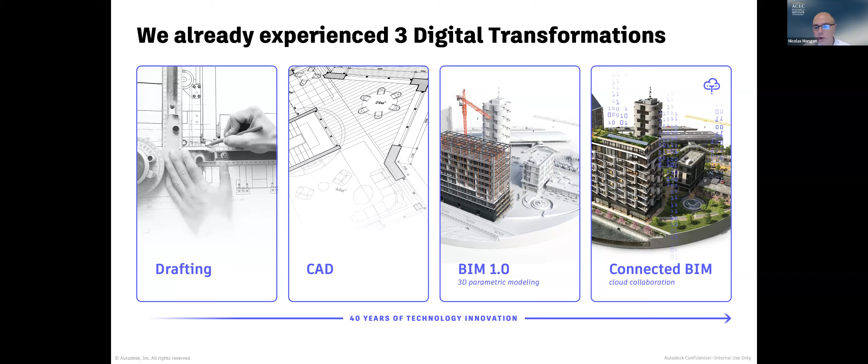Today, BIM is the backbone of the digital transformation. BIM is a process that millions of people in the world are using to design, build, and operate facilities. At the end of the design and construction process, we get a digital twin, so a digital twin is an output of the BIM process. I'll talk about that.

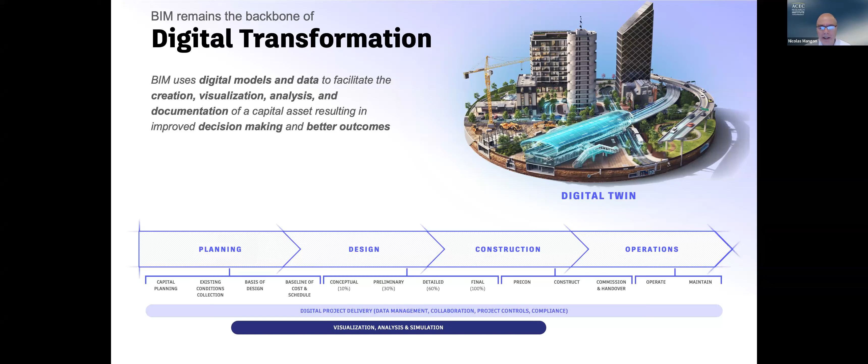But before we do that, I want to talk a little bit about the key trends that are actually shaping our industry right now, and also influence the need of using a digital twin. All of this data that's happening will be foundational for artificial intelligence. Right now, there are three big buckets of trends happening in the industry. The first one is about the demand.

What we are hearing is there's more work than ever before, driven by three things: demographic shifts—the population is growing, moving in and out of cities—stimulus packages, especially in the US, and also sustainability requirements. Last year in the US, we had more renovation projects than new projects, the first time in the history of this country. And finally, resiliency—we need to protect and repair existing assets because of all the natural disasters. So there's a lot of work, more work than we can do.

The second trend is that the way we work has changed dramatically. First, we don't have enough people to do all of that work. We work remotely, and there are challenges in the supply chain. To address some of the challenges around lack of productivity, we see an acceleration of industrialization of construction.

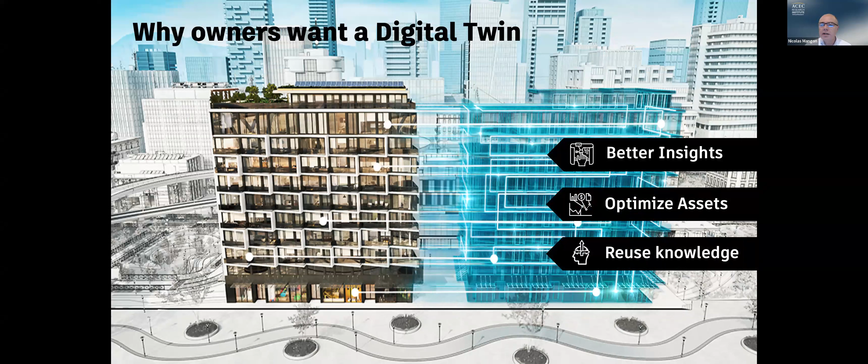But when you think about a digital twin, we need to ask ourselves, why do owners want a digital twin? Because today the owners want to get really three things. So they want to get better insights during the design and construction process. They feel they don't have the visibility in terms of what's happening in the process. So they believe that a digital twin during capital project will help them.

They want to optimize their assets in the long term, meaning in the life cycle of operations, when the cost of ownership for the entire asset is about 70%. So they want to optimize performance.

And then finally, they want to reuse the knowledge of the design, construction and operation process for future projects, right? So they want to capitalize on all of this knowledge, for the next school, the next hospital, the next bridge, the next road, the next tunnel. So they want to capture information during the operations and then reuse it later.

But for the purpose of digital twin, we are going to discuss more what owners want to do with a digital twin. The first thing they want, of course, is a digital handover. And just like we as engineers design and build a physical asset, what we need to do is also design and build a digital asset.

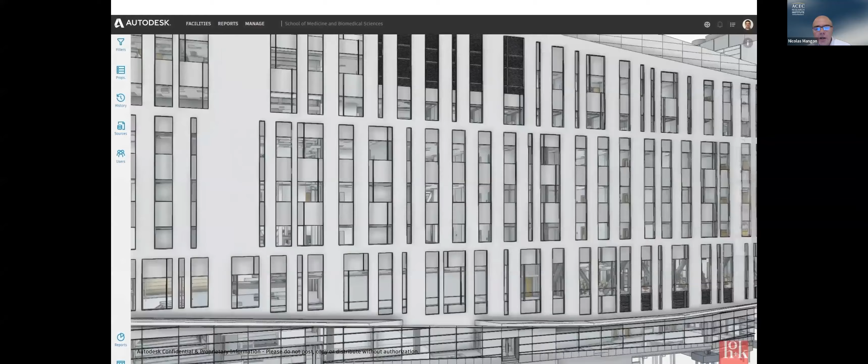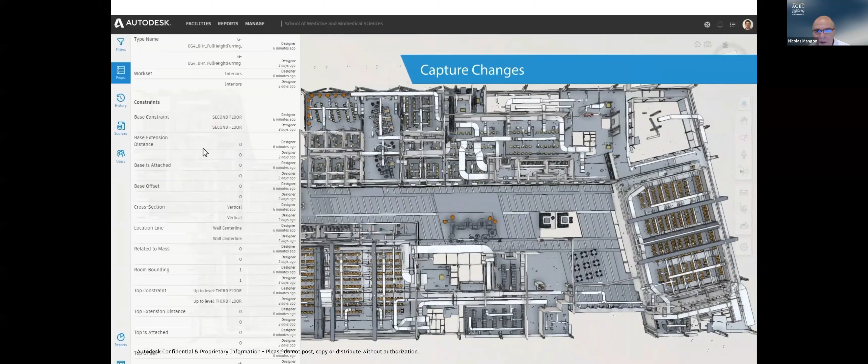It's really the physical representation of an asset. Here it's a building with all the necessary information about each of the components, the systems, but also the maintenance information. Sometimes it's not all the data of a project - maybe the reinforcement is not required, maybe there are things that are not required, maybe just the description but not the physical representation for the owners. So that's I would say the first level.

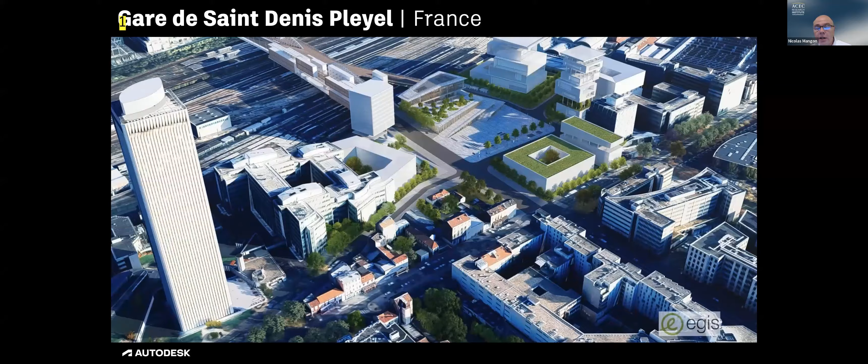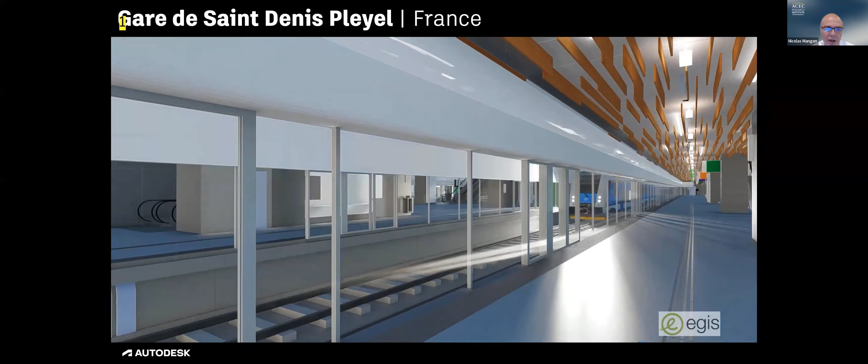And it could apply for buildings, but also for infrastructure projects, just like this train station. This one is in Paris, where I'm from originally. You can see in this case that digital twin was created by a large engineering company called Egis, that maybe some of you might know. So it's an example of using it for infrastructure.

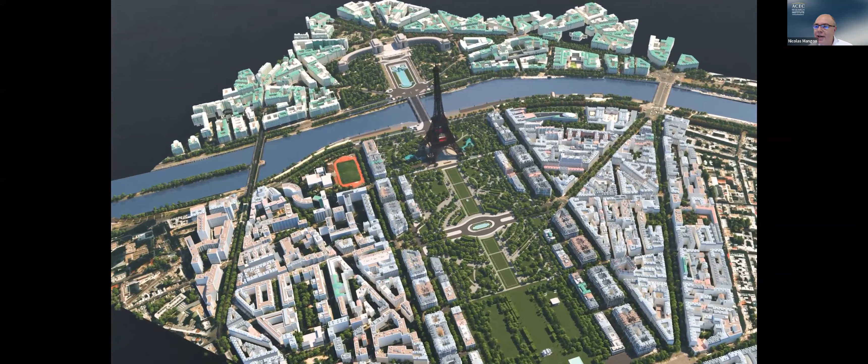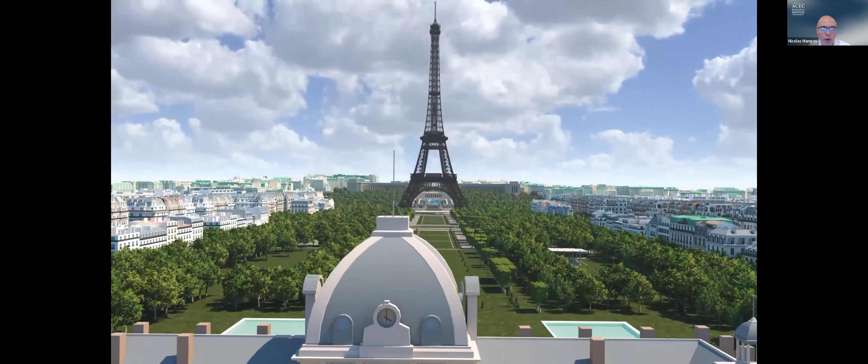And because we love Paris, this is also a project at the city level of a digital twin. The city of Paris is renovating the area of this tower - I think everybody knows about this tower. For this, we worked with WSP to really create a complete digital twin of this neighborhood where everything was modeled, every single tree, utilities, roads, and everything.

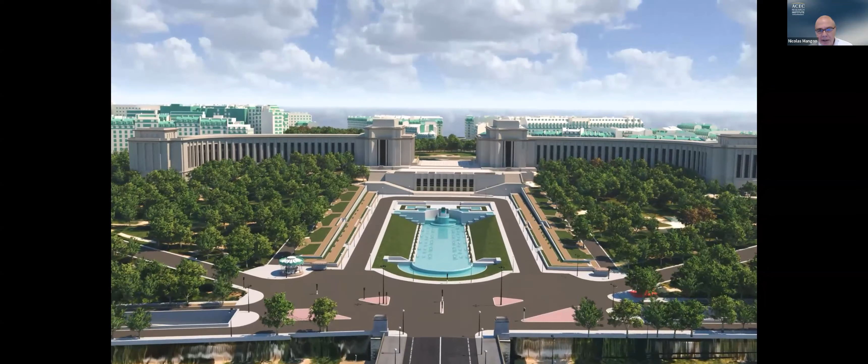In this case, the owner, which is the city of Paris, wanted to have a digital twin really to give it to different architecture and engineering firms so they can submit proposals for the renovation of this space. So everybody would have the exact same data - they don't need to go on site and measure or get any information about the context. That was a way the city of Paris used a descriptive model for digital twin.

The next level of digital twin, which is critical for optimization or performance optimization, is really to connect some of the live data. When I say live data, it's information about sensors - it could be a deflection on a bridge, it could be humidity, temperature, whatever. Basically we want a dashboard to understand what's going on with the asset in real time with any kinds of sensors. So it's about normalizing the representation of time history data.

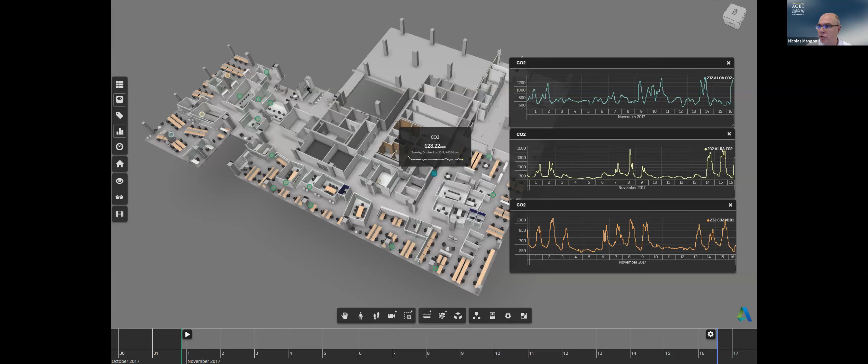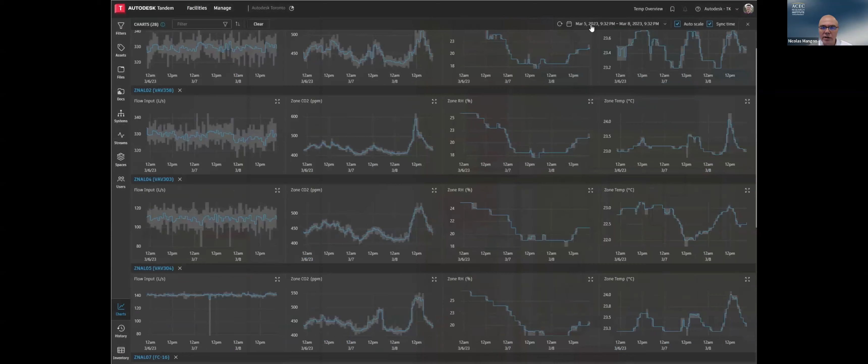It's about representing this information on a 3D model, so it's easier to understand the trends. Here's another example - we can see different heat maps in real time, in this case of temperature, but we can also select a specific room and understand dynamically, humidity, etc. So that's the next level.

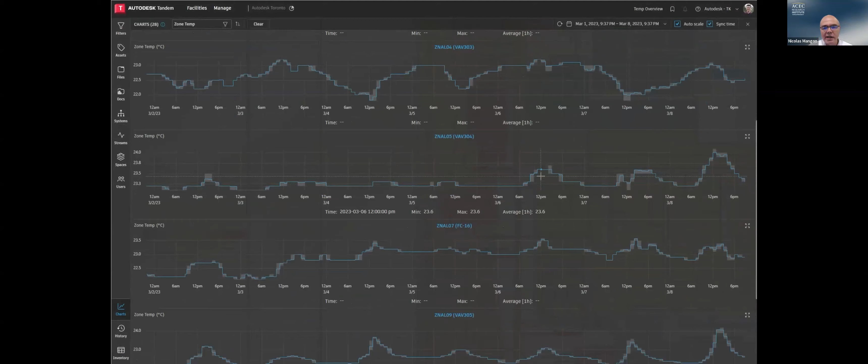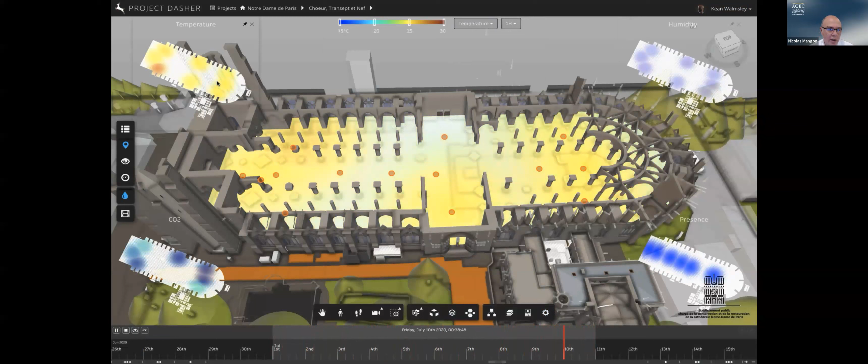As you know, Notre Dame burned almost five years ago, four and a half years ago. So for future projects, we also created a digital twin. On this digital twin, in real time, you can measure carbon, you can measure presence. So remotely you can understand the different things happening in this building.

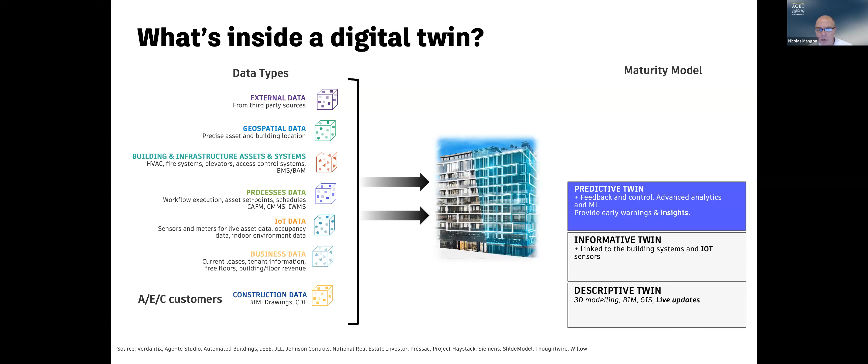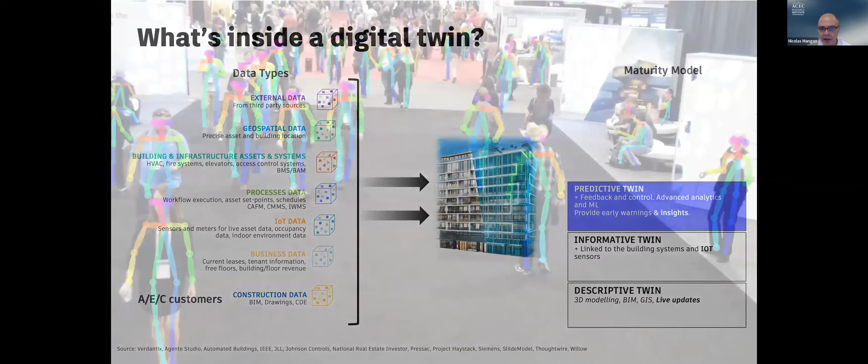The next level of digital twin is what we call a predictive twin. In this case, it's about providing advanced analytics, providing insights, providing warnings about something that's happening in the facility. Here's an example of analytics - in real time, using computer vision, you can actually track what people are doing, and you can also analyze, for instance, if they go in a specific space, are they going in the right direction or not.

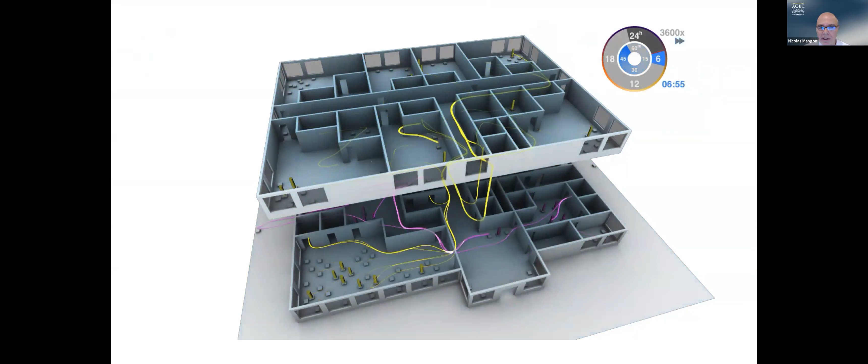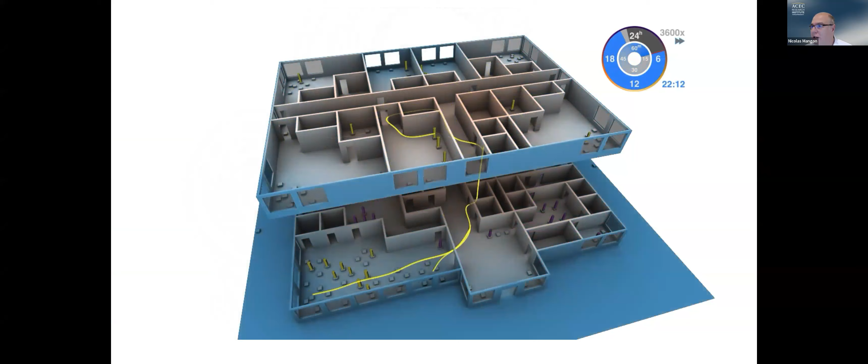I'll show you this visualization, for instance, where the digital twin shows us during the day where people are circulating in this facility, and it's also based on temperature when we open or close windows. So it's advanced analytics to really track what's happening - that's the level of insights you can get from a facility. If it's a bridge, you can look at traffic, pollution, all kinds of different factors at the same time.

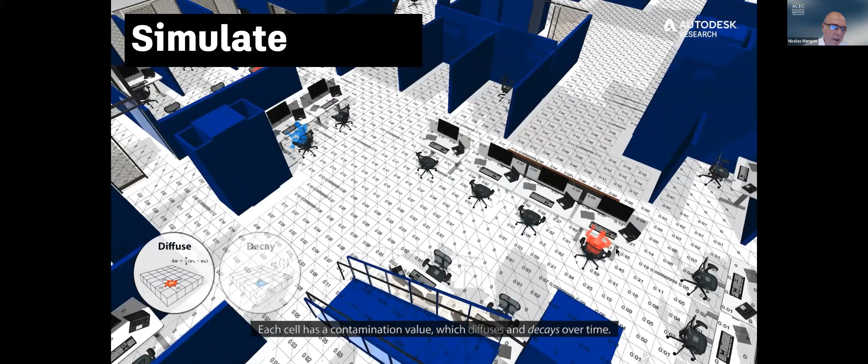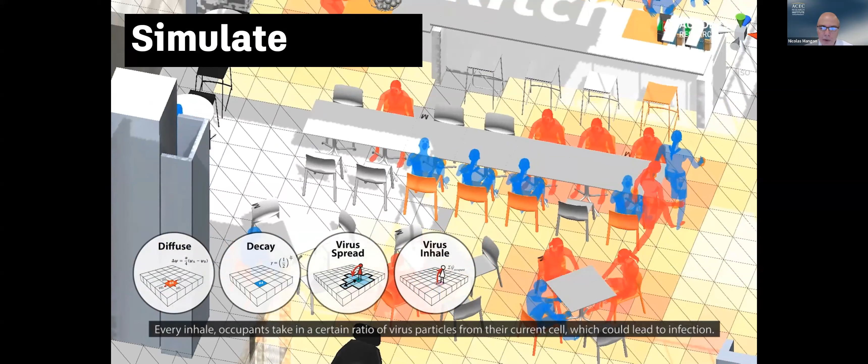The next level, almost the last one before we start questions, is what we call the comprehensive twin. Really, in this case, what owners want to do with a twin is a real-time simulation - they want to do what-if scenarios, simulate different things happening in the built environment. One example we researched with owners during COVID was the spread of the virus on high-touch surfaces, but also airborne, and we could build this model in a digital twin to understand how the virus would be transmitted from one person to another.

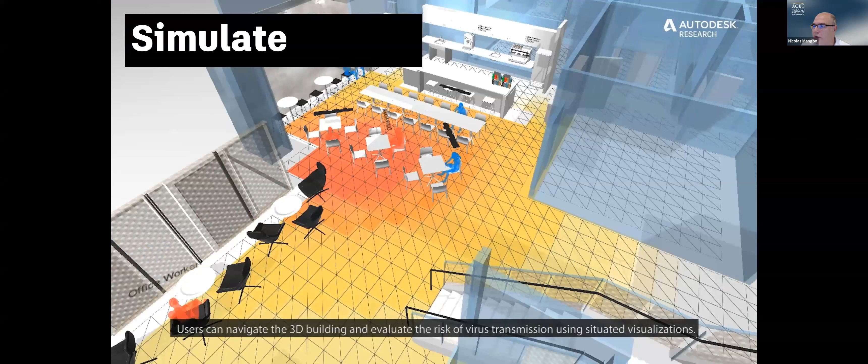And then that was used by this owner to reorganize the flows in the building. So it's a good example of using simulations for understanding what's happening.

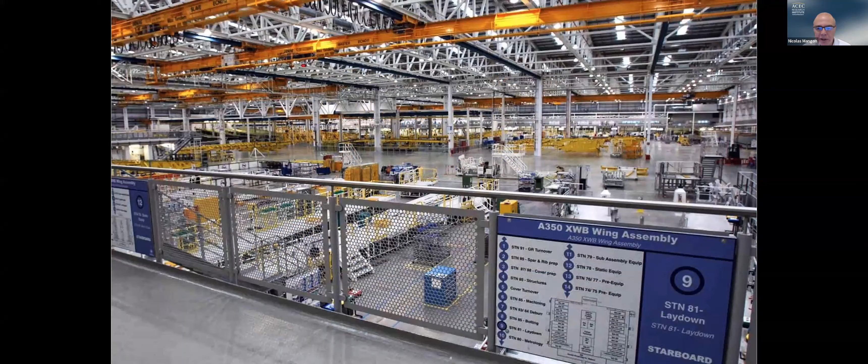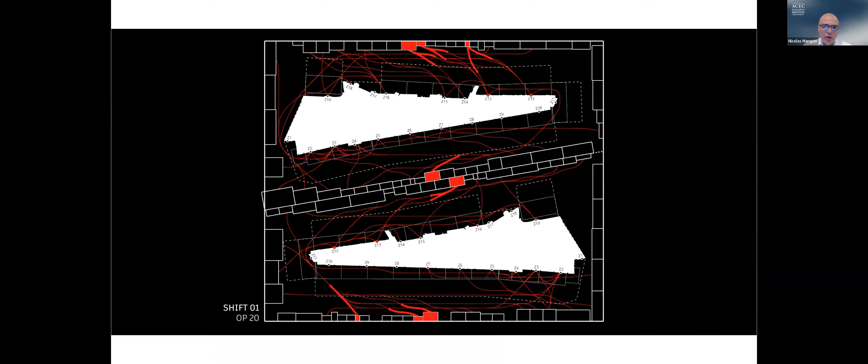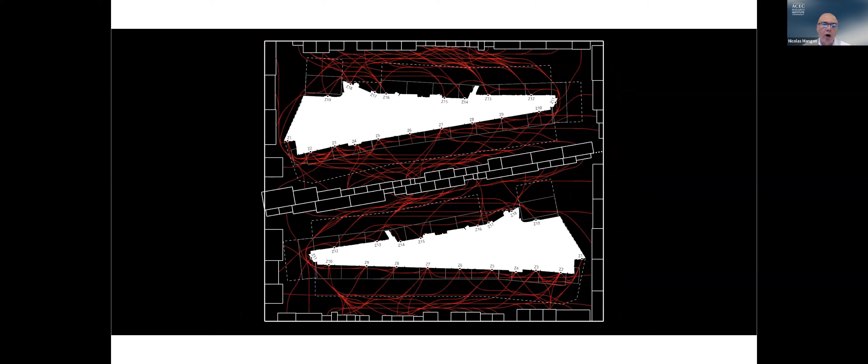We wanted to minimize the distance they need to walk to get specific tools. You can see here a simulation of a digital twin of the factory where we could optimize the best path forward. So that was an example of doing these real-time simulations and prescriptive analytics, where the digital twin could recommend a different way of placing the wings.

And then finally, the last level of maturity for a digital twin will be around autonomous twin, where just like self-driving cars that we have today more and more, the assets will also be self-driving, if you will, and autonomous, and make decisions on behalf of users. Of course it will be powered by a lot of artificial intelligence, and we'll talk about it in the next section.

So just to close on the topic of digital twin, today if you look at commercial products and where things are scaling, we are really in the descriptive twin. That's most of the digital twins, and some informative twins, but it's very early. Digital twins are still pretty rare because owners do not know necessarily how to articulate their needs. We see more tech companies, like Microsoft, Google and Facebook, that are very aware of this because of their background, and they are in a better position to articulate what they want.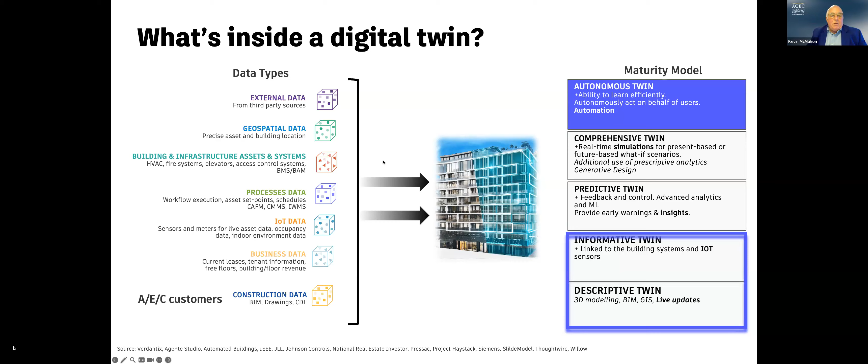Nicolas, thank you very much. That was very, very informative, and I think gave us all a sense of the different levels of digital twins.

One comment before we get to the first question: as you mentioned, tech companies are more aware of the possibilities of digital twins, but it sounds like they may also be better skilled at delivering digital twins to clients. So the industry needs to catch up to be in a better position to advance this needed tool. With that in mind, how can a firm, whether smaller, mid-sized, or larger, get started creating digital twins? Where do you develop the talent to do this?

Yeah, so we are still in the early days of this technology. Just to give you an idea, today about 60% of engineering firms create 3D models. So still not the entire industry uses 3D models. I think number one, the use of 3D modeling becomes more important, and that's where companies need to start. But before we get there, a conversation with the client about what they want to do with a digital twin is important.

Because if you look 10, 15 years ago, a lot of owners were asking for 3D models or BIM deliverables. In their mind it was really to get the projects on time, on schedule, but not really to use the assets. Now the conversation is evolving, and when owners require a BIM deliverable or a digital twin, it's critical to understand what they want to do with it, because you will put some level of information in it based on their needs. Sometimes it's just for measuring things, sometimes to track performance, sometimes for managing maintenance, etc.

Okay, so AI needs to be powered by better connected data, and I think that's fundamental. If you think about the future of BIM, it needs to be powered by better data. First, what we need is this concept of a digital thread where data needs to flow from one place to another. Today, I wish it's happening, but it's not happening. People exchange files, you import, you export, you lose data, you recreate the information, and that's just going from planning to design to construction, and if you're lucky, to operations.

But the value chain of data is very fragmented, very manual. With an explosion of tools, people spend most of their time managing data and moving data around. And in this case, I'm not even talking about bringing data back for learning. So I think that's the second part. To really empower AI, we need to have this digital thread where the data can flow. That's fundamental, that's a prerequisite.

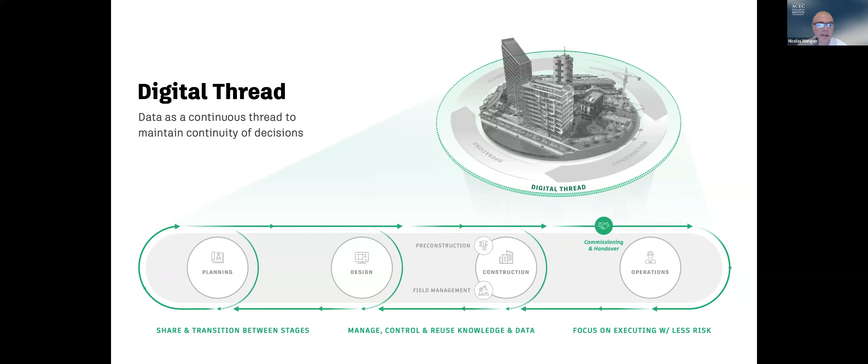And the way you do it is by changing the way software companies like Autodesk, but many others like Bentley and others, need to organize the data. And for us, at the center of it, there is this idea of granular data.

Today there are many vertical tools, many point solutions, where files are really associated with the tool. So moving forward, what you will see from a lot of different technology companies is we are going to decouple the data from the applications.

And when we do that, we create a different kind of data repository, where data is very granular. Every piece of data will be of the same currency, whether it's a column, a beam, a line, a circle, a window, whatever, whether you use a horizontal tool or a vertical tool, all the data needs to be the same currency.

If we get to that point, then the data will be able to flow a lot more seamlessly. You don't need to import or export. All of the applications will just access this granular data.

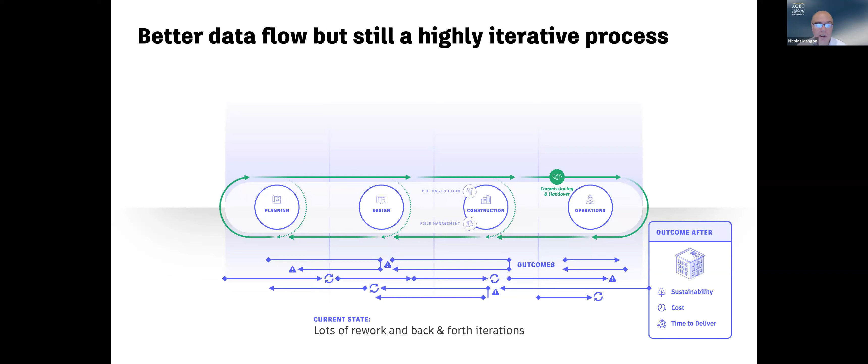very different, where we define the outcomes in the beginning. And we say, hey AI, I want a building that's going to cost 200 million. I want it to be delivered in February 2026. I want it to be prefabricated. I want it to be net zero, or whatever.

And then the AI, based on real world context, previous projects, and all kinds of rules, will only suggest options that meet this criteria, meaning the outcomes that you want. That's what we call an outcome-based approach, where you start with the criteria, whatever they are, and then you get an outcome. Instead of getting the first or the second or the third option, you get the best option.

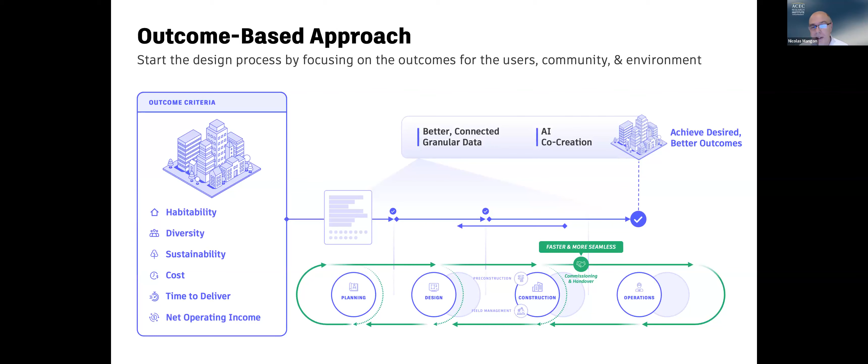So that's a long-term vision. It's going to take a while, it's going to take a decade, before we get to something final. But that's the idea, where there's co-creation: you define your goals, and then the AI will create something for you.

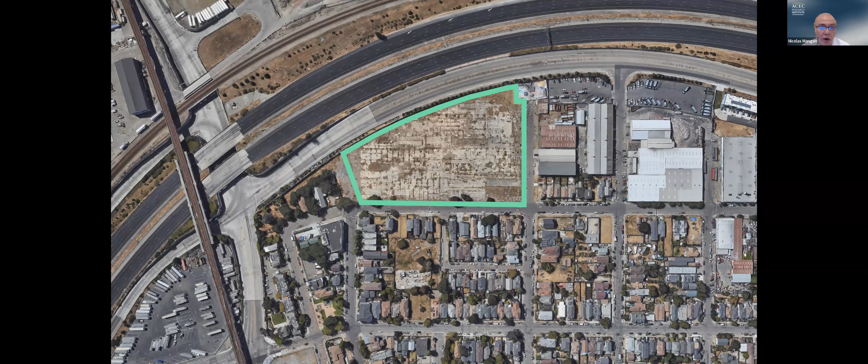So I can show you a couple of examples here that we've done. Simple project, it's actually in the Bay Area, I think on the East Bay near Oakland. It's a development, and in this case, we asked the AI, based on a set of outcomes that you can see here, to generate all kinds of options.

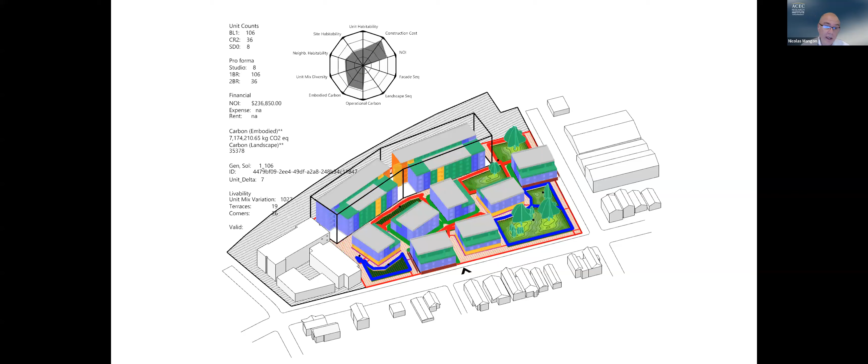And then the AI will iterate and find some solution. It's never going to be perfect, so as a designer, you pick what criteria are the most important. If you say I want a building that costs $1 with 50 units, it's not going to happen, right? So you need to prioritize your outcomes. That's an example of AI iterating here.

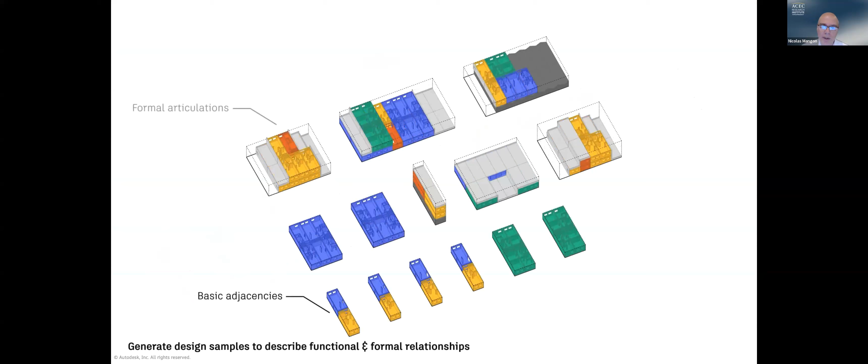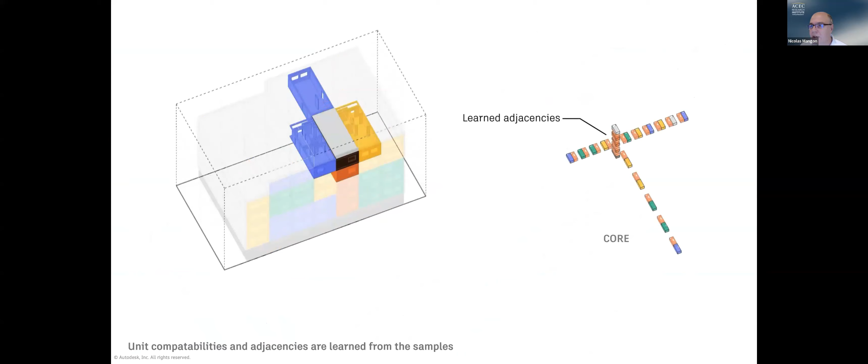But let's say we make it a little bit more complex. We want to use modular construction, and we built a library of different modules, like a kitchen, like a one bedroom, etc. In this case, for a given solution that the AI found, we can say, hey, find the best combination of these modules, so we meet the cost, we meet the time, we meet the local requirements, etc.

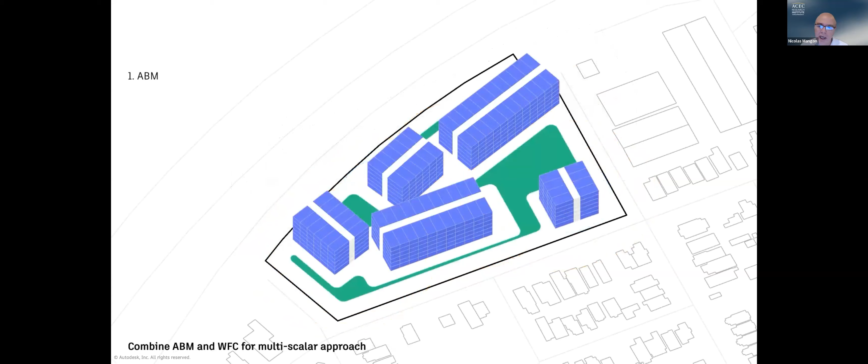So in this case, the AI, for a set of buildings for one solution, iterates and then finds the best solution. But we can make it even more complex. In this case, we can ask the AI to iterate not only on the shape of the buildings, but also on the components.

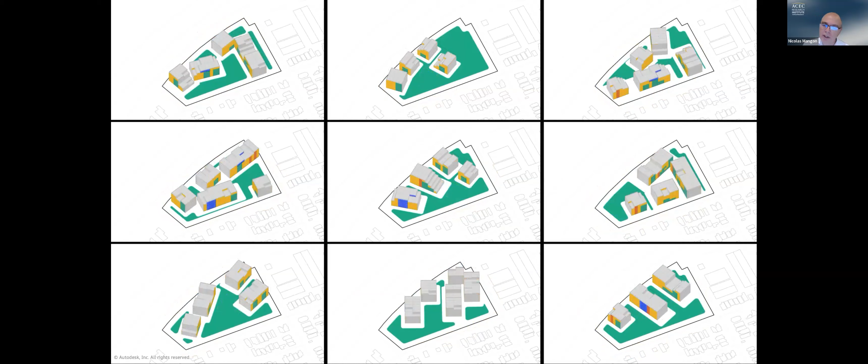And here you get hundreds of thousands or millions of different solutions, and the AI will tell you which one is best. That's an example of what we call generative AI. Is it perfect? No, but it's a very good first draft.

I'm sure by now you notice English is not my first language. So when I need to write a letter or something, I don't like it because English is not my first language. I start with ChatGPT and say, I want a letter like this, for an application for my daughter, for an apartment or whatnot. And ChatGPT would create a very good first draft, and I change it, I tweak it, and then I can keep going and do my work. Here it's the same — the AI gives you the first option, not the best option, and then you can keep going.

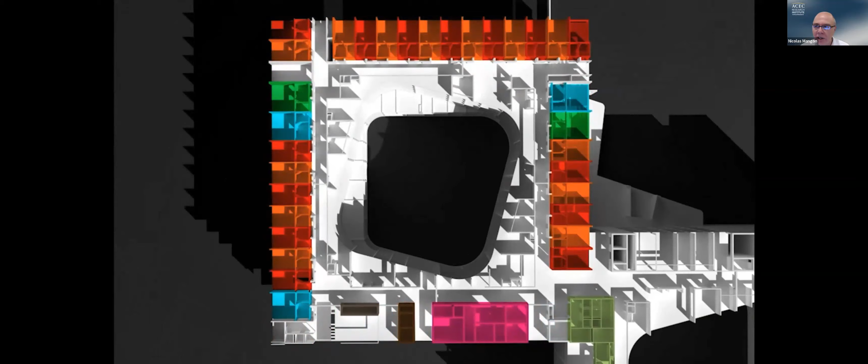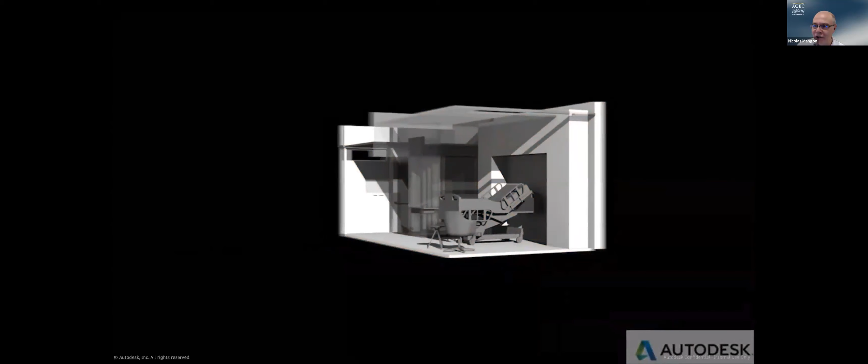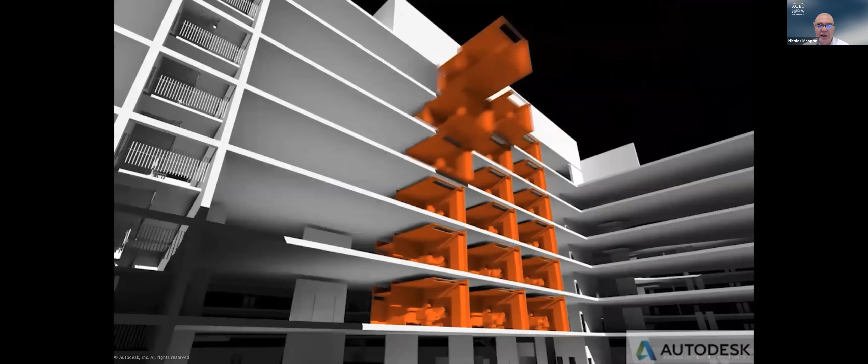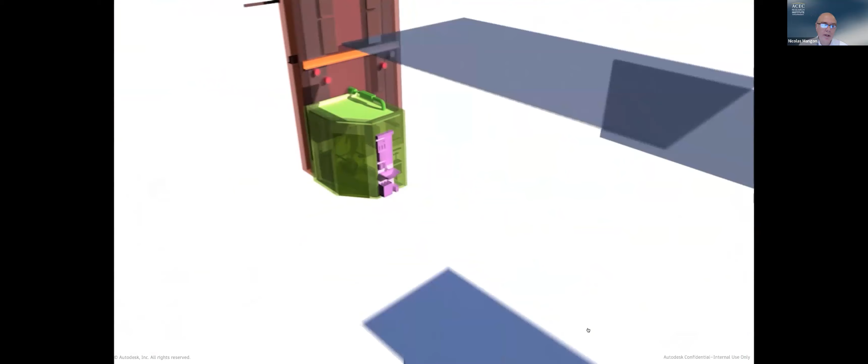So it's an example where the AI informs you, gives you insights, and suggests something, but it's not creation. Another example here, still on the same topic: it's generative AI, where the AI can pick the right components to create a module — that's a combination of informative and generative AI.

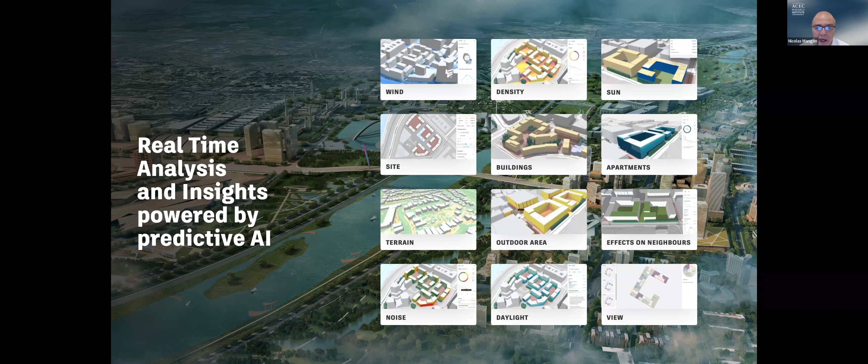The last example I want to show you — if we have engineers, I think it's mind-blowing for me. It's what we call predictive AI, and basically what it does is real-time analysis. Today, if you want to do a structural analysis, non-linear structural analysis, energy analysis, or CFD fluid dynamics analysis, it may take 10, 15, 20 minutes, an hour — it takes a long time. That's why you don't do calculations all the time.

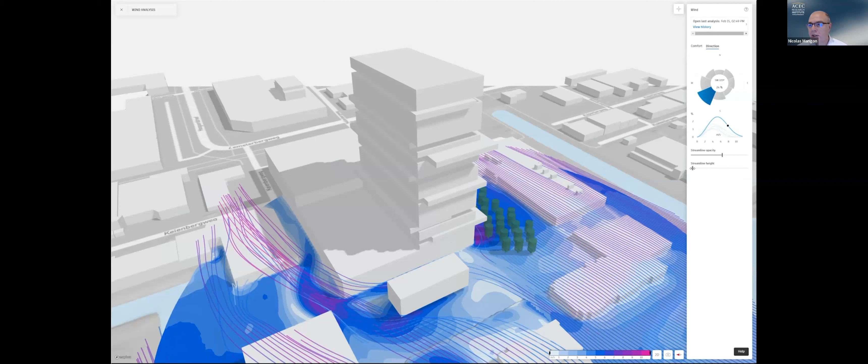Imagine there are AI models that can do these calculations in a tenth of a second. Here's an example of CFD analysis, computational fluid dynamics, where we can do almost real-time analysis — a tenth of a second — with a predictive AI model. So we don't solve for the full data sets, but we use this predictive AI, and the accuracy is between 90 to 98%. That's fantastic — so it's another way.

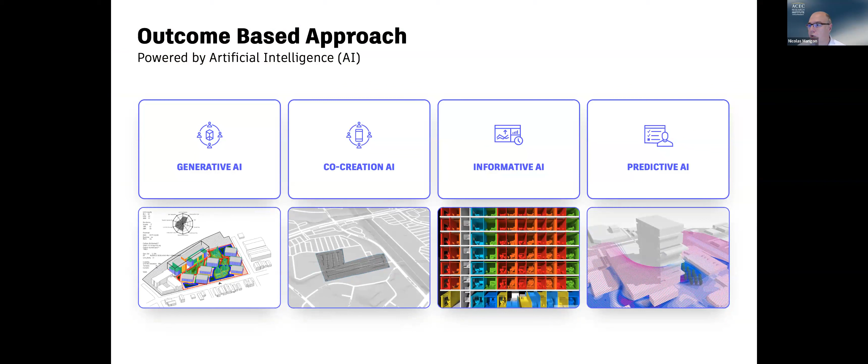So just to close, we have 4 different types of AI. I didn't show too much of co-creation, but generative, co-creation, informative, and predictive. There will be many other applications of AI in the future. That's my last slide that I wanted to share with you.

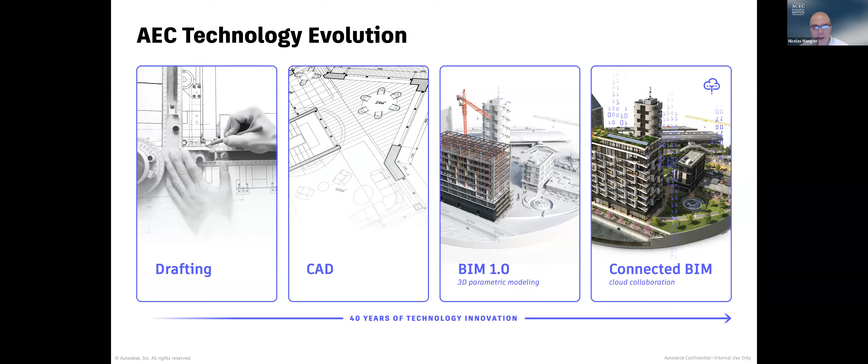So today we saw these 3 transformations, but we are just at the beginning of a 4th transformation for our industry. Just like we had CAD, we had parametric modeling, leveraging the cloud, we are entering this world. Maybe we call it the future of BIM, or however. Right now we call it the outcome-based approach, as opposed to model-based approach, where the AI will start creating content for you and be part of your processes. Still very early stages, but we are entering this world.

And I'm going to pause now.

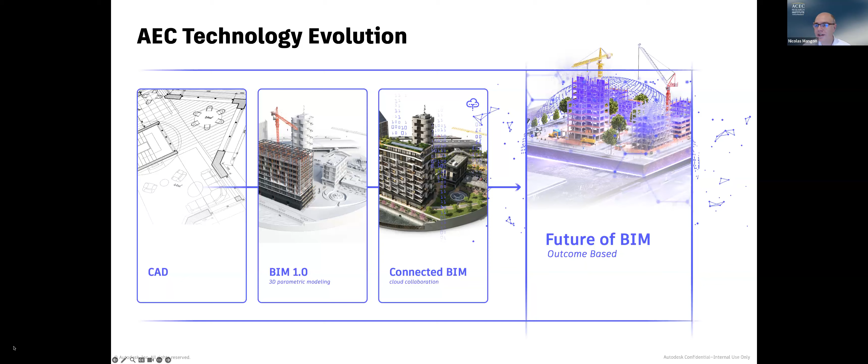All right, thanks Nicolas. We've got a bunch of great questions in the chat box, and I'm going to ask Daphne to sort out a couple of them. But first, I want to ask you this general question, which I think has got all of our firm leaders thinking: how does a firm develop a grounding in AI so it doesn't get out of control with every engineer in the firm doing whatever they want with it? How do you create a discipline around it, your own firm approach to using AI? It seems like that's a huge challenge going forward.

Yeah, so first, as I mentioned, we are in the early days. There are a lot of things we need to figure out as an industry, as technology vendors, etc. I think we need to understand the benefits of using AI. So I think companies need to start learning about what AI can do, what AI is good for, and not so good for.

I think it's important to go in with an open mind to understand the potential. What we've started to see more recently, because engineering firms collect a lot of data, is more and more of these firms hiring data scientists. I think data scientists are becoming key new types of employees for the firm of the future. Everybody creates a ton of data now—data is the new gold, the new oil. We all need to better understand the data we create, so I think there's a world where we'll have more data scientists as part of our firms. Construction companies do a ton of this because they want to better understand how they perform, to do scheduling, predict risk on the job site, etc. Engineering companies have started to do a lot more too. So I think it's critical to start hiring data scientists.